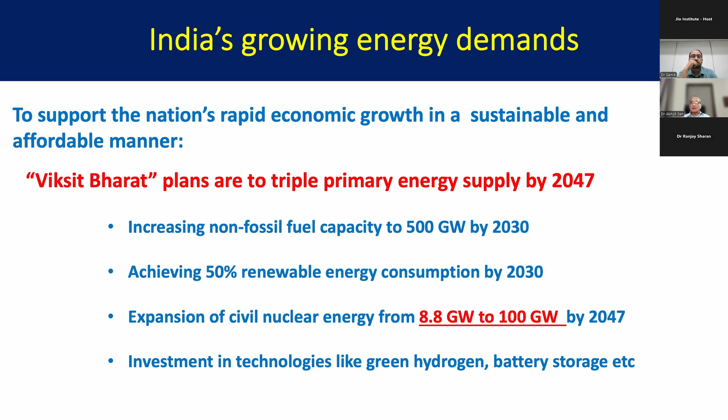India has really made significant progress in this direction. In fact, even before 2030, I think we have achieved this goal of increasing our renewables and getting clean energy. However, the problem with renewables is that you can get clean energy, but it has variable generation. So nuclear power is the only clean energy with a constant base load, and that is our primary need.

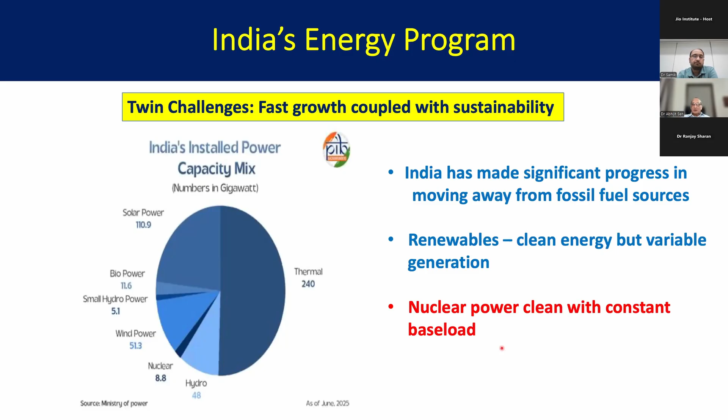So India had already thought about this way back, and they put in a very elaborate nuclear program in place, which is the famous India's three-stage nuclear program, designed to keep in mind India's modest uranium resources, but abundant thorium resources. This was framed way back by Homi Bhabha, and it's based on a closed fuel cycle principle.

The first stage uses pressurized heavy water reactors using a mix of uranium-235 and 238, which also produces a small quantity of plutonium-239. The second stage, which is now being developed and is about to begin, is to use a fast breeder reactor to generate more plutonium-239 and energy, and over time build up the plutonium inventory, and then use thorium as a blanket to breed U-233.

And this will then be used in the final stage to produce very large production of electricity. To speed up this process, there is now talk of encouraging private sector investment in nuclear power projects, including the development of small modular reactors, which is the recent innovation in this field.

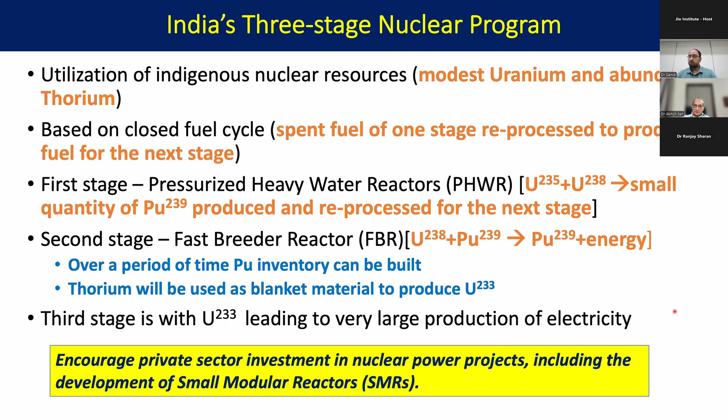So where do we start? What is the case for fusion in this context? Why should we consider it? As you know, fusion has an abundant fuel.

The basic fuel that we use is deuterium from seawater, and tritium can be bred in a reactor. So there's no shortage of fuel. It's also very energy dense - it's 4 times as much as nuclear fission reactions at an equal mass. Of course, it is clean - no CO2, no long-lived radioactivity, no risk of proliferation - and it's safe because there's no risk of meltdown. So fusion forms an attractive and strategic component of a net zero energy mix for the future.

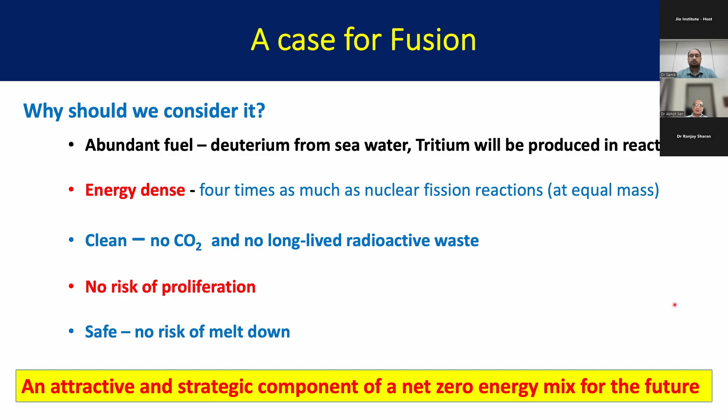This has been known for a very long time. The basic principles have been known, and all these advantages have also been well known. So therefore, fusion has been pursued for a very long time. It's actually been the holy grail of energy research. And there were a lot of false announcements in the past.

Way back in 1951, there was this claim by Argentina's dictator, Juan Perón, that they were working on secret research on a remote island, and that they had already achieved fusion. But later on, this research became classified. The famous case is Project Sherwood in the USA. Then around 1955, at the Atoms for Peace conference, fusion was declassified. And this is where Homi Bhabha, as the chairman, made his famous prediction that fusion will be available in 20 years.

More progress was made in the late 60s when the Russians started working on a tokamak. In their T3 tokamak, they announced a 1,000 electron volt electron temperature, which was the highest at that time, and which surprised everybody. But this was then confirmed by scientists from Culham and Artsimovich, who actually toured the US.

This established a working relationship between the US and the Soviet Union. So the big question is, if this was so long known and work has been done for such a long time, why is it taking so long? We still don't have fusion, despite Bhabha's prediction in 1955.

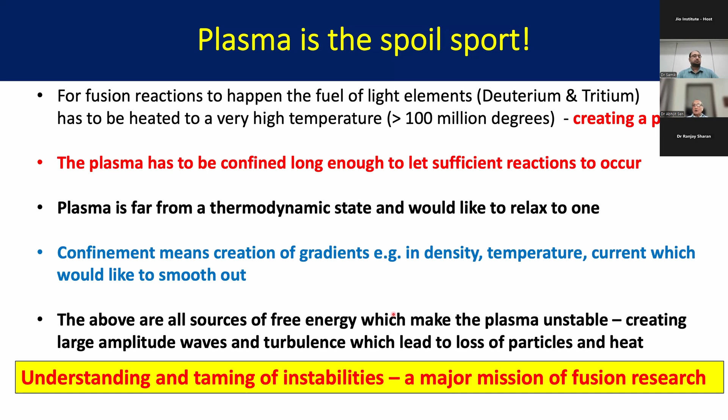So all these are sources of free energy which make the plasma highly unstable. The plasma would like to get out of this confined state, and it does so by creating large amplitude turbulence, which leads to loss of particles and heat. This collective phenomena in plasmas is an aspect that was ignored very early on, when people thought that just by confining charged particles in a magnetic trap, you could achieve fusion. But once this was understood, the whole subject of understanding and taming instabilities began, and this has been the major mission of fusion research over the past several decades.

So what are these plasma instabilities? You can think of a fluid where you have these waves, and the waves can go to large amplitudes. You can categorize it by the scale size - gross distortions, which arise from large-scale collective motions, are one class of instabilities. Or you could have very fine-scale instabilities, which involve the interaction of these gross waves with particle distributions, and this can lead to turbulence, and turbulence can lead to a rapid loss of confinement.

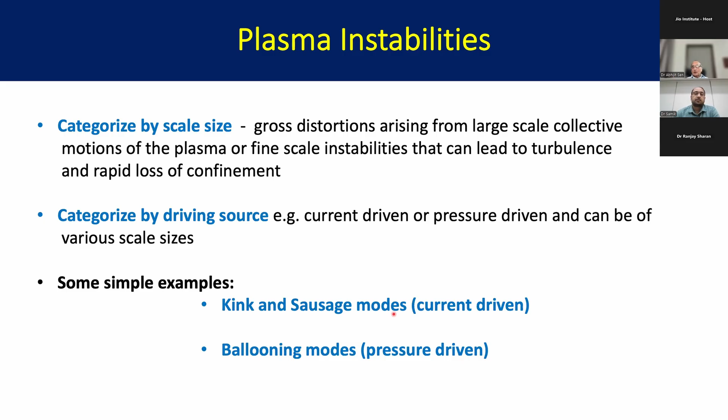You can also categorize it by what is driving the instability. The driving source could be a current, or it could be pressure, and these can again be of various scale sizes. Some simple examples studied from the early days are things like kink and sausage modes, which are current-driven, and ballooning modes, which are pressure-driven. Here is an example of a kink and sausage instability.

Just to give one example, in the early days they were studying pinch experiments, in which you pass a current in one direction, and this current generates magnetic fields which encircle it, and this tends to compress the plasma - that was the pinch configuration. But if you now perturb this configuration slightly, for example pushing it out this way, you can see the magnetic fields are more densely configured on this side and more sparsely configured on this side. So the magnetic pressure is higher here and lower on the other side, and that pushes the distortion much more, making it unstable.

So this kind of thing was also manifested in toroidal devices. These are some actual pictures from early pinch experiments. People found ways of controlling this by putting in a magnetic field or a conducting wall outside, and so this was the early days of instability studies.

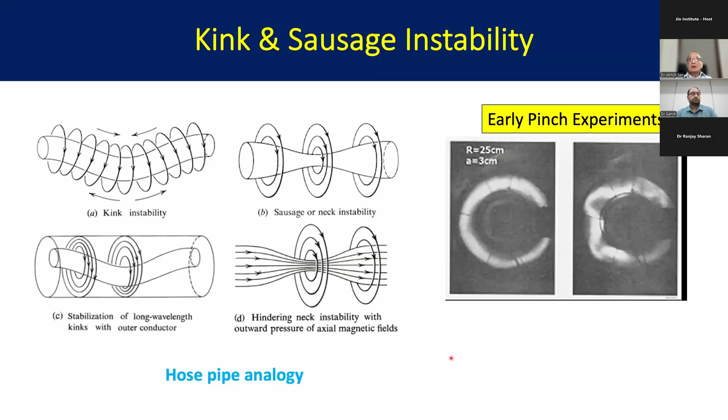But these things also show up in the tokamak configuration. In the first lecture, Rajesh had shown how you create a tokamak configuration by a combination of a toroidal current, toroidal magnetic field, and a poloidal magnetic field. These create very nice nested magnetic surfaces, and the plasma is basically confined by these well-formed magnetic surfaces.

So the way the toroidal field and the poloidal field wind around each other, that winding number, the inverse of that, is specified by a quantity called Q. It essentially defines the twist that you have in the magnetic field line. It depends on the ratio of the minor to the major radius and the toroidal field and the poloidal field. So it's proportional to 1 over the poloidal current, or the plasma current, that you generate in the toroidal direction, which is what creates the poloidal field.

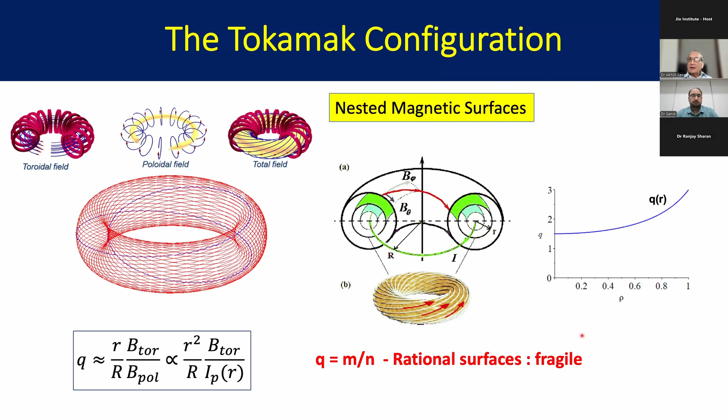So this factor Q is a continuous function, increasing towards the edge of the plasma in a tokamak. There are certain surfaces here called rational surfaces, where m and n are integers, and these are very fragile. This is where, if you disturb those surfaces, they can create an instability there.

One of the earliest and most widely studied such instabilities is the sawtooth instability. This is a kink instability that takes place at the Q equal to 1 surface, and basically it's a thermal instability.

As you keep heating the plasma, the current at the core keeps increasing, because the current depends on collisionality, and as you heat it, the collisions go down. So the current increases, therefore Q starts going down. If it goes below 1, it triggers an instability.

What happens is it starts forming these islands. As this instability steepens the gradient there, it triggers a kink instability, which is what's growing. As the island finally hits the surface, the whole gradient relaxes and it crashes. The waveform you observe, either in temperature or density, has this sawtooth-like form: it rises slowly and then crashes.

By themselves, they are not very bad. They're called internal disruptions, and if kept at a reasonable level, they actually eject impurities from the core of the plasma - it's like a burping of the plasma. But if they become very large, they can cause problems.

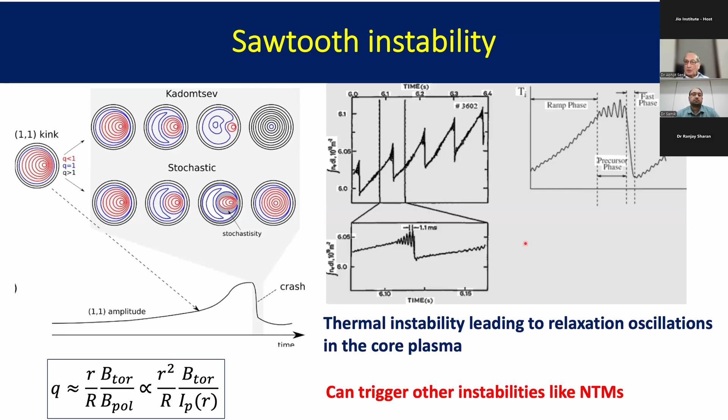Then there is something called the classical tearing instability, which occurs at other mode rational surfaces, like Q equal to 2, 3, 4, etc., or even 3 by 2. What happens is at those surfaces, if you create a perturbation in the magnetic surface, they slowly start growing into an island.

That means the surface is broken up, and you can imagine the fields being cut and reconstructed to form an island. So that's the form you see here - from the nice circular nested surfaces, on one surface you start developing a magnetic island.

Along this magnetic island, because the particles are traveling very fast around the toroidal direction, the pressure becomes flat in those directions. So that can degrade confinement.

If these islands grow very large in amplitude, they can also interact with each other - islands developing on two surfaces can, for example, nonlinearly interact. This creates a major perturbation in the plasma, leading to something called a major disruption, in which the current is suddenly totally destroyed and all this energy is sent to the wall. This is what Dr. Vaty had also discussed in his talk last time.

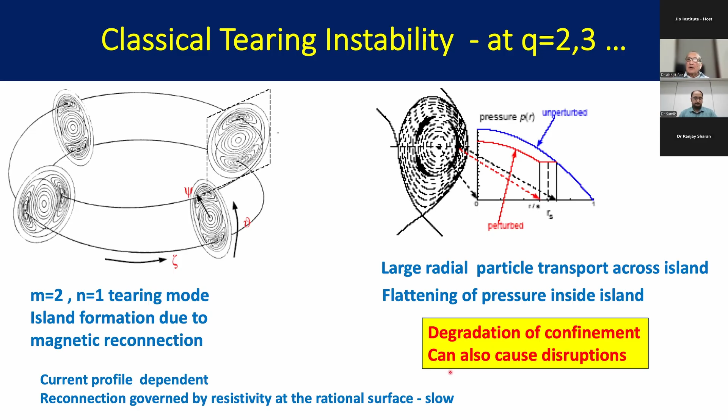The basic physics underlying it is this whole business about reconnection, in which the field lines are rearranged, governed by the plasma resistivity at those particular rational surfaces. It's normally a very slow process, so if you do not have a long-lived plasma, it may not pose a great threat. You can normally control this by modifying the profile of the current.

But when you go to very large, very high temperature plasmas, there is an analog of this called the neoclassical tearing mode. Neoclassical in this sense means that in a toroidal geometry, you have another class of particles, because as you go along the magnetic field, and since the field is increasing from the outer edge to the inner, you can have a mirror-like configuration. Some particles get trapped in this mirror-like thing, and that gives rise to a current.

This is called the bootstrap current - bootstrap because it depends on the plasma gradient itself. So the plasma is self-generating this current, which is really a good thing, because then you can reduce the current that you are imposing from outside.

But these instabilities can actually reduce your confinement by a great deal, and therefore they can really limit the amount of pressure that you can hold in the plasma - this is a quantity called beta. So they are a major concern for all reactor-grade machines, and if they grow very large, they can also create major disruptions.

So control of NTMs has been a major research effort over the years. The basic idea is that within this island, the bootstrap current is lost, and that's what creates this instability.

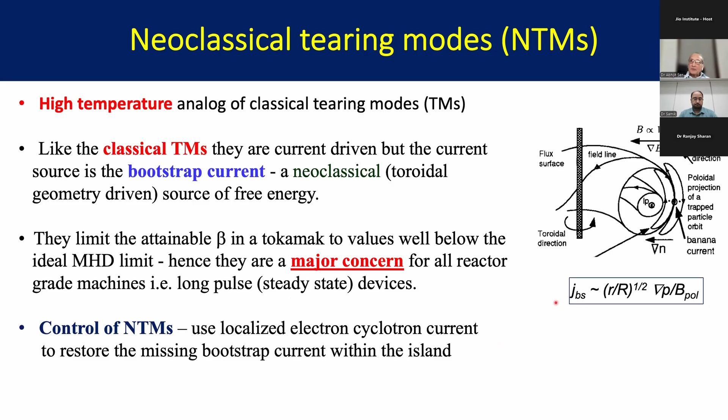So one way is to restore the current within that island. The way people do that is to first locate the island and then drive an external current through it using localized electron cyclotron current drive. This current drive mechanism can restore the bootstrap current, and again you can heal the island. This is a well-developed technique now.

Another class are these pressure-driven instabilities, called ballooning instability. The name comes from the fact that it's as if the column is ballooning on the outside. Look at the analogy of air in a tire tube: as you put more pressure in, because the outer surface of the tube is vulnerable, having stretched more than the inside, you can create a bulge there - that's ballooning. A similar thing happens here, because on the outer side of the tokamak the magnetic field lines are more sparsely spread out compared to the inner side, making it a weaker surface, and the plasma can balloon out through that region. These take the form of plumes or fingers, and this is another reason why you can limit the plasma pressure.

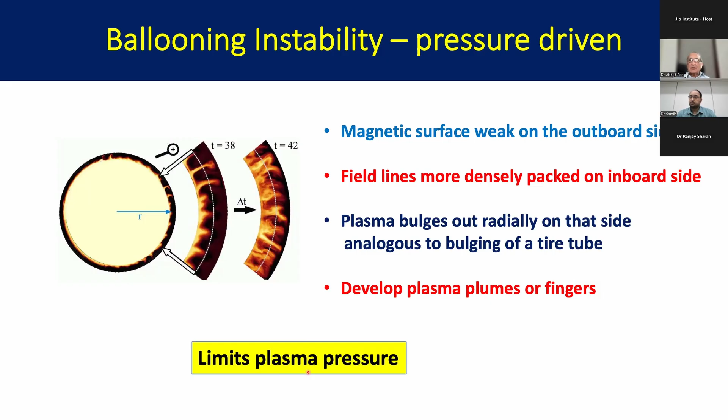This happens because you develop a barrier at the edge, by actually shrinking and moving the profile, both the current profile and the pressure profile, inward. A steep barrier is created which limits the loss of energy from the core. It's like heating a pressure cooker from outside - this transport barrier is like the lid of the vessel. If you heat it extremely highly, the whole barrier can explode.

So the lid can take off, and you would have an explosive instability, or in this case, a major disruption. The way out is to actually leave a little hole or space in the lid so you can put a little spoon under it and leak out the energy. This is done in a tokamak by having external resonant perturbations, which create little islands, like holes in the magnetic surface, and these leak out the energy. That is how you control ELMs to a reasonable level so you don't put too much energy onto the wall of the tokamak.

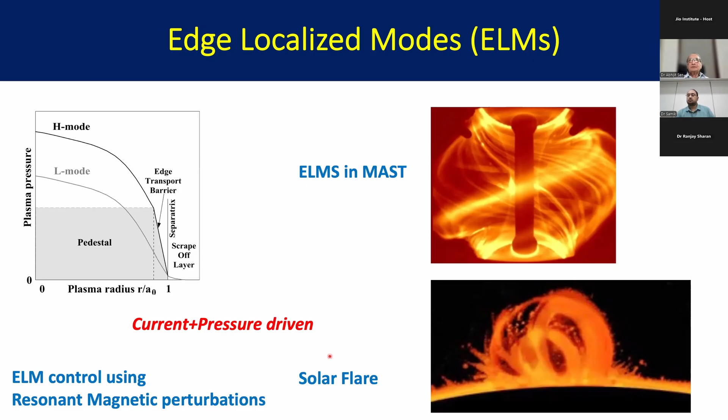Control and mitigation of instabilities has been a major thrust in plasma physics. The instabilities I discussed are called magnetohydrodynamic instabilities. These have been controlled using a combination of in-vessel magnetic coils, localized current drive at various frequencies, and if everything else fails, a disruption mitigation system using massive gas injection so you can radiate away the energy, or using shattered pellets.

These things have made great progress in recent times through the use of AI and ML, machine learning methods. The basic idea is that if you build up a large database, you can collect all the data and try to evolve an algorithm which will detect beforehand when a disruption will occur. This has been a major improvement in the control of tokamaks.

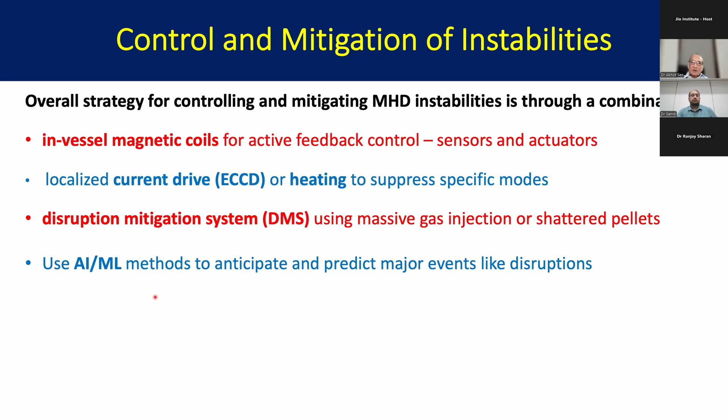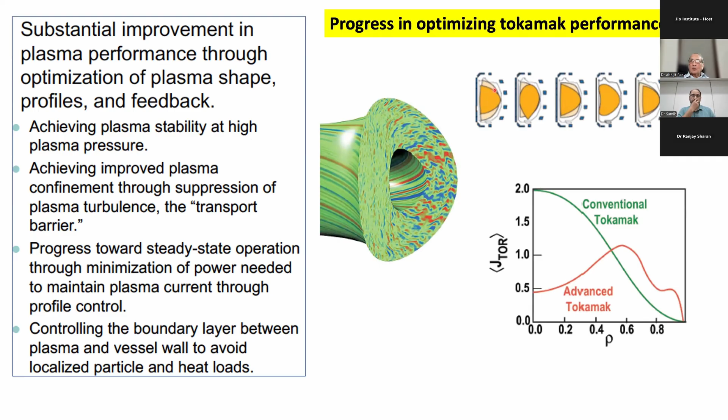This just shows how simulations have helped in shaping the tokamak profiles and improving confinement. All this has led to controlling a tokamak plasma being like actually flying an airplane - you really have to have real-time control of several features. This is just a diagram to show how you're controlling all these features in a tokamak.

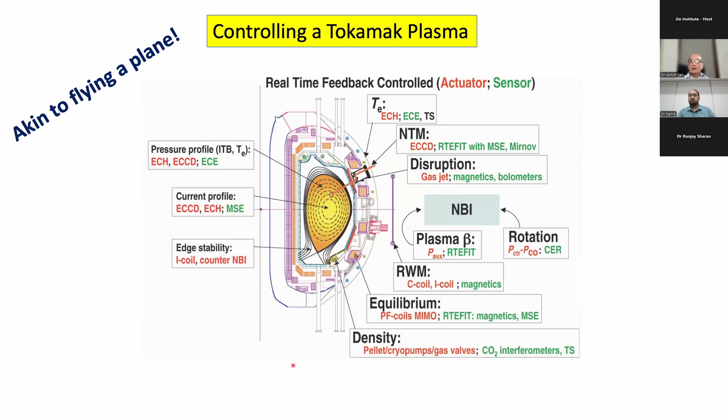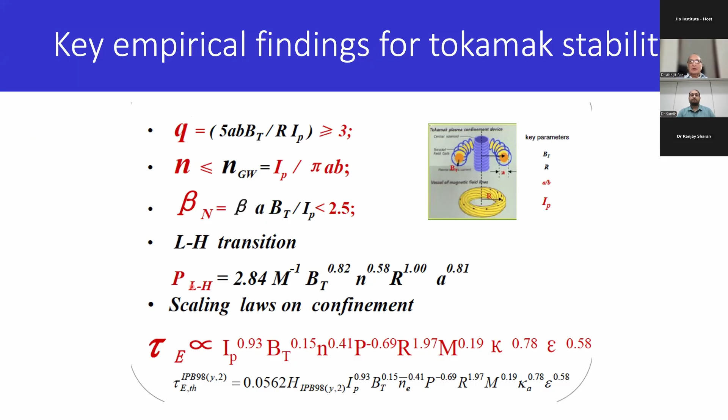All this research over several years has led to many key empirical findings for tokamak stability, basically defining the limits of quantities like Q and beta, which has defined a safe parameter regime for tokamak operation. This is what has helped the development of all these results and the progression of tokamak performance.

Ever since ITER started, a special group was formed called the International Tokamak Physics Activity, an expert group drawn from various countries responsible for defining the physics basis for the operation of a tokamak and the design of ITER. Over the past few years, they've improved and extended this to cover operation of a tokamak when it goes into the burning plasma.

There's been a series of articles in a special issue of Nuclear Fusion highlighting all the critical issues, major areas of progress, and most significant recent results. This is excellent reference material which I'd recommend for students, and it's also very good for experts to find out the recent state of affairs.

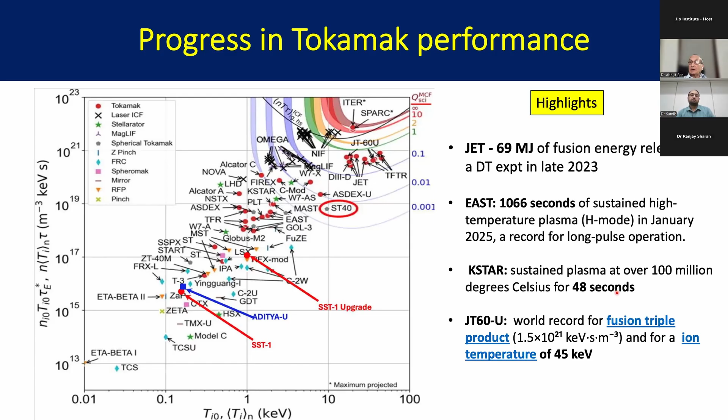So these are some of the highlights of the tokamaks. JET obtained 69 megajoules of fusion energy in a DT experiment late in 2023, after which JET was shut down. EAST, a Chinese tokamak, obtained a record pulse length of more than 1,000 seconds. K-STAR also sustained plasma at over 100 million degrees for 48 seconds, which is a record. And JT60U has a record triple product.

Against this background, let me come now to the Indian fusion program. There's a bit of prehistory. You've already been told how Homi Bhabha was the very first strong advocate of fusion energy. His presidential remark was over-optimistic, but it succeeded in opening up fusion research in the world and triggering a whole worldwide activity. He also himself set up an experimental program on a theta pinch.

Theta pinch means the current is in the poloidal direction, at TIFR. This was a very nice program, but unfortunately it was wound up in the early 60s due to some adverse publicity that fell out of a UK pinch experiment called Zeta. So it was felt that fusion was not feasible.

The next major attempt was in the early 70s, when Dr. Sarabhai formulated a plan for the development of plasma physics in order to strengthen the space physics program he had already initiated in PRL, and also to lead eventually to a fusion program. He handpicked a team of scientists from India and abroad to form a core group at PRL, which included Professor Predhiman Kaw.

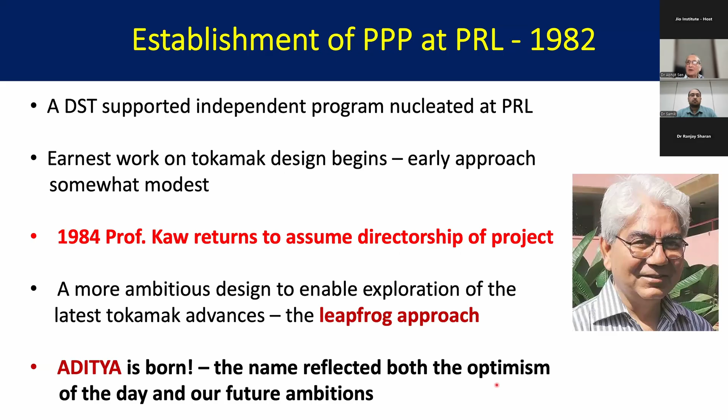The idea was that we had lost some time while tokamaks in the world had made such progress. So this was the leapfrog approach that we took, and that is how Aditya was born. As you can see, the name reflected both the optimism of the day and our future ambitions. We're trying to create a sun on earth.

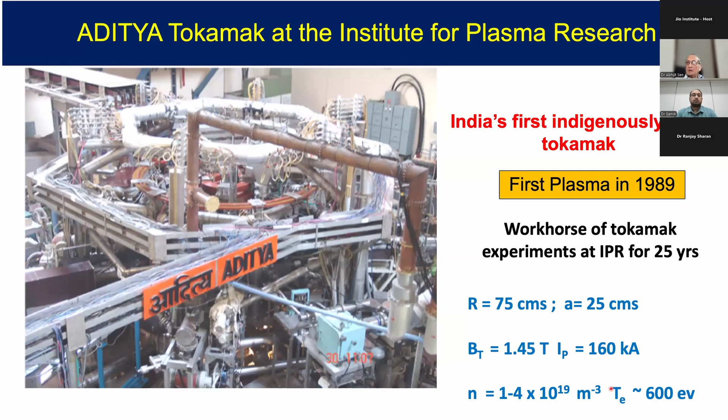Here's a picture of the Aditya tokamak at the Institute for Plasma Research. Its first plasma was obtained in 1989, and this has been the workhorse of tokamak experiments at IPR since then, for over the last 25 years now. It's a medium-sized tokamak of 75 centimeters major radius and 25 centimeters minor radius, with a magnetic field of about 1.45 Tesla and a current of 160 kiloamperes. The densities are in this region, and the temperatures that we have obtained at the maximum is about 600 eV.

So Aditya, right from the very beginning, explored many frontier areas of plasma physics and fusion physics. One of its earliest successes was the discovery of intermittency in the edge transport, which showed that the transport in the edge was not a continuous phenomena, but happened in bursts. This was a new phenomena which was then replicated by many other tokamaks. Then there were density limit experiments, all those parameters that I've shown you earlier, which actually define the safe parameter regime for any tokamak, depending upon its intrinsic parameters and the density and temperature that you can get.

An important experiment in the later years that Aditya undertook was the study of runaway electrons. These are very fast electrons which can get generated when you have a disruption, and these can be very harmful. They can actually puncture holes in your wall. So the question was how to avoid disruptions and how to mitigate disruption. These were contributed to the ITPA disruption database, and this was an important contribution from Aditya.

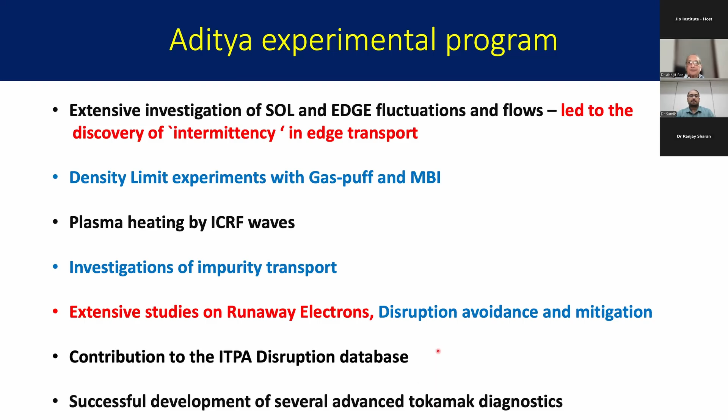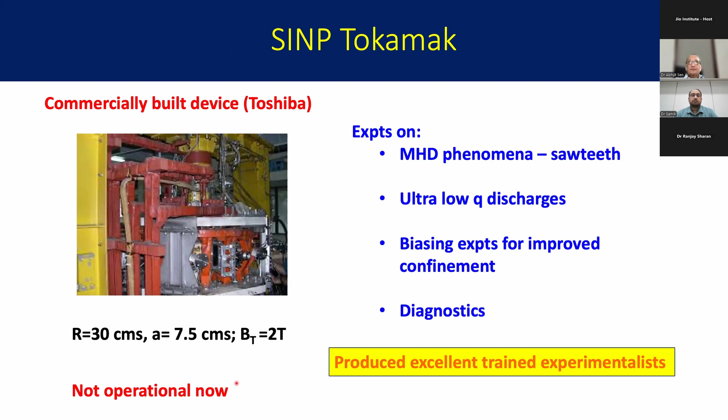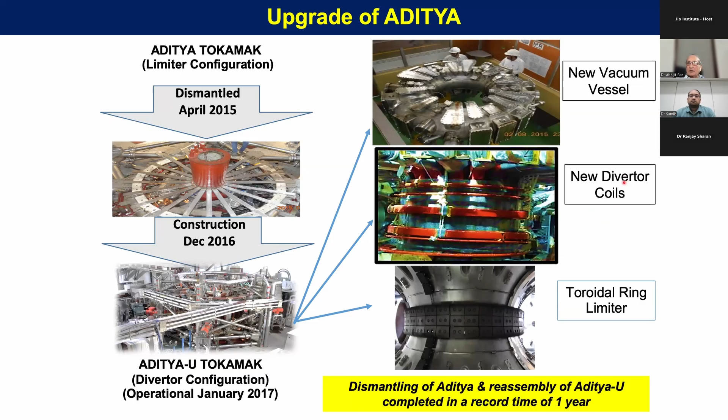Then in 2015, it was decided to upgrade Aditya to improve its capabilities. This was done in a rapid time of about 1 year. Basically what was changed was we got a new vacuum vessel and also new divertor coils. Aditya didn't have a divertor configuration earlier, along with some other hardware changes.

With Aditya U, again, a number of experiments which were at the leading edge of tokamak research in the world were carried out, including deuterium plasma operation, some novel approaches towards disruption control, runaway electron mitigation, and also very nice pellet injection experiments. A very nice pellet injector was developed in IPR, and this was tested out on Aditya.

To summarize, both Aditya and Aditya U served as rich physics research devices and also provided experience in handling a number of tokamak-related technologies. The other nice thing is it trained a number of students and technical personnel in this area.

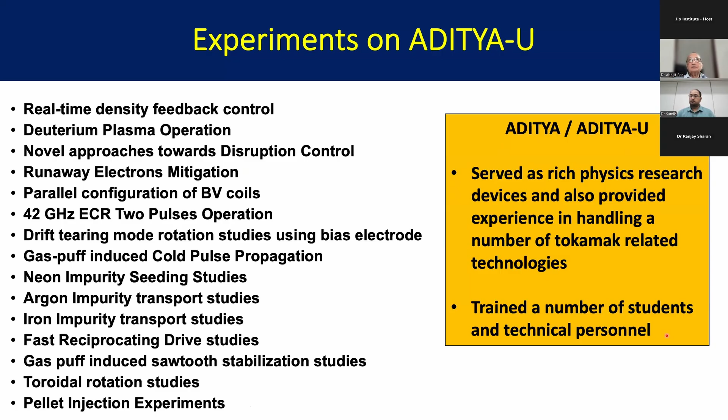The next big step happened in 1996 when we got the approval for building a superconducting tokamak, which was named SST-1. This was a state-of-the-art superconducting steady-state tokamak, which had features like shaping the plasma and a divertor. It was designed for a 1,000-second pulse. At that time, it was in the same class as EAST, KSTAR, and JT-60, which were just coming up at that time. It was not very large, just slightly larger than Aditya - 1.1 meter - but it had a very high magnetic field of 3 Tesla and superconducting magnets, so the hope was it could maintain the plasma for a very long period.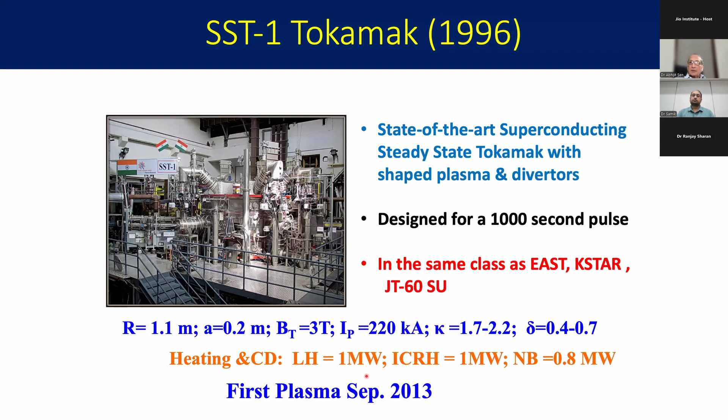It had a lot of capacity for heating and current drive at various devices using lower hybrid or ion cyclotron resonance heating and neutral beam heating. On this device, the first plasma was obtained in September 2013.

Here's a summary of SST-1 technical and physics achievements. One was that it was able to energize the magnet up to 2.7 Tesla, which is almost 90% of the design value. It achieved a plasma current of 100 kiloamperes, though not up to the design value yet. It also was able to integrate and reliably operate the liquid helium cryo plant at full capacity, and this was one of the biggest plant capacities in India.

Then all this experience with ultra-high vacuum systems. This was the largest toroidal vacuum vessel in India at that time. It also demonstrated lower hybrid current drive in its phase 1 operation.

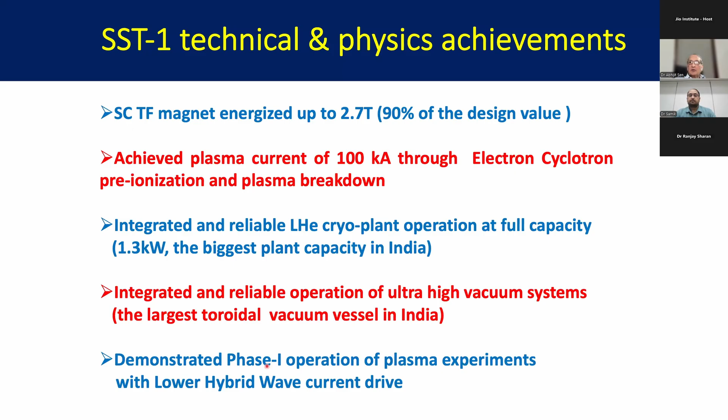It ran something like 29 experimental campaigns till June 2023. But during these campaigns, intermittently it faced technical problems related to the superconducting magnets and the cryolines. There were leaks that developed in the cryostat, the SC magnets, and the cryolines. Eventually one had to stop these campaigns and attend to these problems that we were facing.

This has been thoroughly analyzed, and a decision was taken to refurbish the SST tokamak. This refurbishment process has already started, and phase 1 of refurbishment has been completed. Now they have started machine cool down, and it's expected that SST-1 will resume operation shortly. There are also plans to upgrade all the other subsystems of the machine.

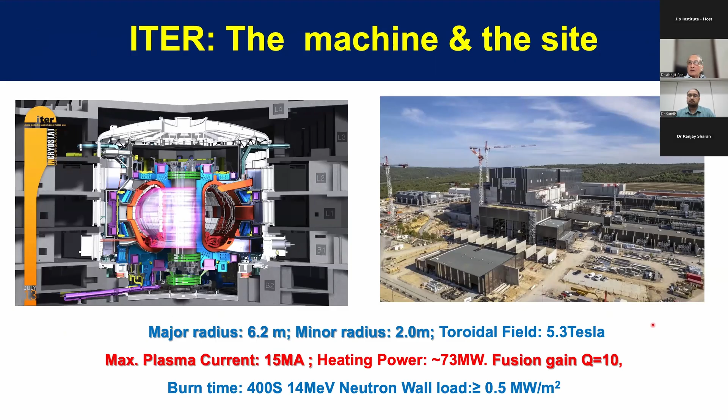Here's a picture of ITER, which is the biggest tokamak to be built, and it's making good progress, as you can see, and it's expected that it should be operational in a few years.

India had the responsibility to supply about 10% of the major procurement packages that ITER needed. Here are some of the packages described. If you look at the cryostat, which is the biggest cryostat in the world, or the biggest vacuum vessel you can think of, this was one of the things India was assigned to do. Many of these packages involved first-of-its-kind technology and required R&D to actually accomplish those technologies. This was a major challenge, which I think benefited us a lot.

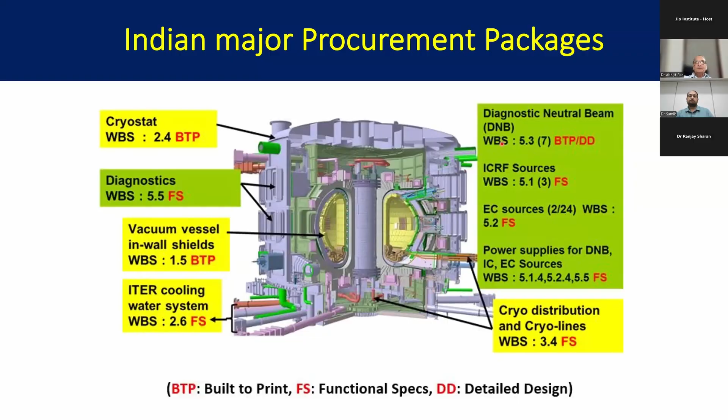India has now more or less delivered most of the packages it had undertaken. Here's an example of the cryostat. It's a huge device, as you can see, weighing 3,850 tons. This has been delivered and is being assembled in ITER.

It also developed very high voltage power supplies and ITER distribution lines, which are under manufacturing. These are the lines being installed in ITER.

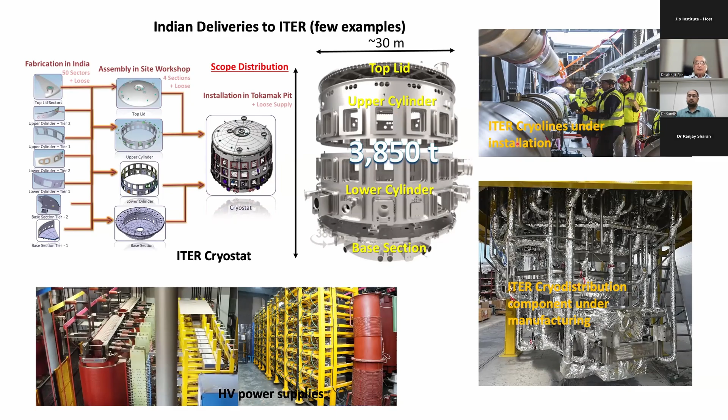Another big advantage of participating in ITER was that it set up R&D facilities in IPR to ensure ITER deliveries. These are highly sophisticated test facilities, for example, for neutral beams, IC heating, electron cyclotron heating, created in a special lab for ITER-related developments in IPR. These test facilities will qualify and establish that the deliverable parameters for ITER are reached for each of these subsystems.

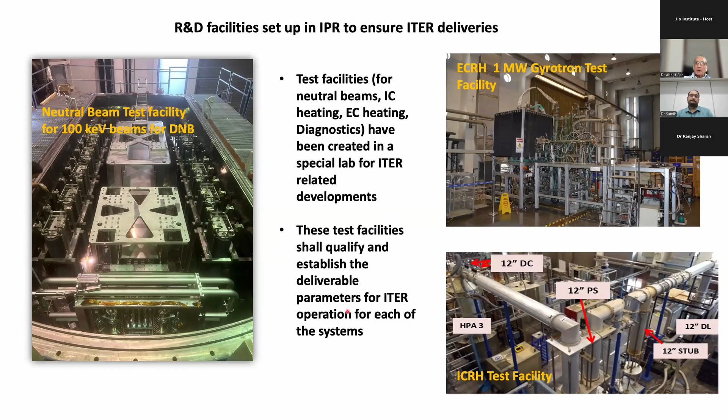It's also been a big boon for Indian industry. Indian industries have acquired competence in manufacturing that meets demanding international nuclear quality and safety standards. Some major Indian industries have actually participated in fulfilling these ITER packages that India has been asked to deliver.

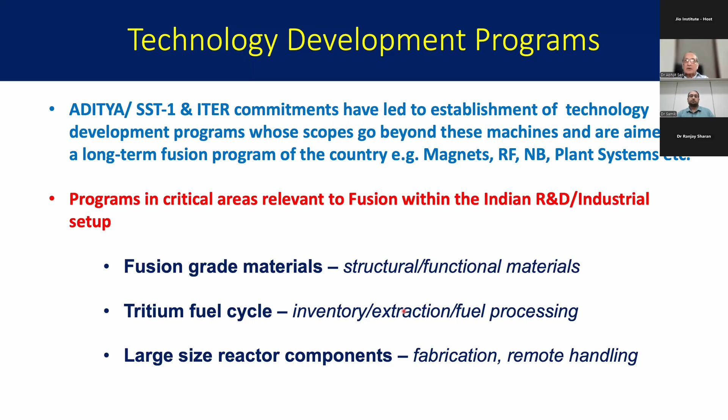Both Aditya, SST-1, and ITER commitments have led to establishment of technology development programs whose scope actually goes beyond these machines and is aimed at a long-term fusion program of the country. Some examples are in magnets, radio frequency heating or current drive, neutral beams, and plant systems. Also, programs in critical areas relevant to fusion have been set up within the Indian R&D and industrial setup, for example, work on fusion-grade materials, tritium fuel cycle, which is part of the DA program, and large-size reactor components.

So that is our state today. And where do we go from here? That is the main question that we need to address now.

The usual path to a fusion reactor consists of three important stages. One is the stage when scientifically you achieve break-even, which means you satisfy the Lawson criteria. This can be done only through making progress in plasma parameters and confinement time so that you finally come to control of the plasma.

After you achieve scientific break-even, you can design and demonstrate a demo device where you use all this scientific expertise, but also prove the engineering feasibility and establish that it can generate energy, so that you can go on to a machine which will actually deliver electricity to the grid. So these are the three major steps.

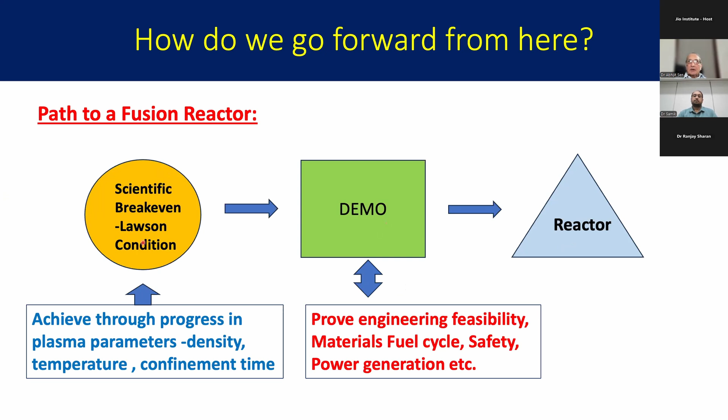But the most critical step is this: from scientific break-even, how do you project to a demo? Let's see what other people have done in this respect. What are the global projections for demos?

If you look at the major parties, for example the European Union, this is banking on ITER to demonstrate break-even. That is their break-even machine, and they have participated and also sponsored ITER to a very large extent. ITER plans to start operation in 2035, which is their latest prediction. It will commence DT operation in 2039 to achieve break-even.

So EU is planning its design activities to start around 2027, construction in 2040, and operation in 2050, followed by a commercial reactor in the second half of this century. That is the usual conservative path to a fusion reactor, which EU is following. Of course, EU individual members have their own fusion programs, comprising several tokamaks and other devices spanning several decades.

JET has been one of their star performers in this, as I showed earlier. Next, you come to USA.

It's one of the longest histories of fusion research with several experimental devices. Their program has actually gone through several ups and downs in the past, but they have a tremendous record in achieving good plasma progress. Their program is spread over national laboratories as well as universities.

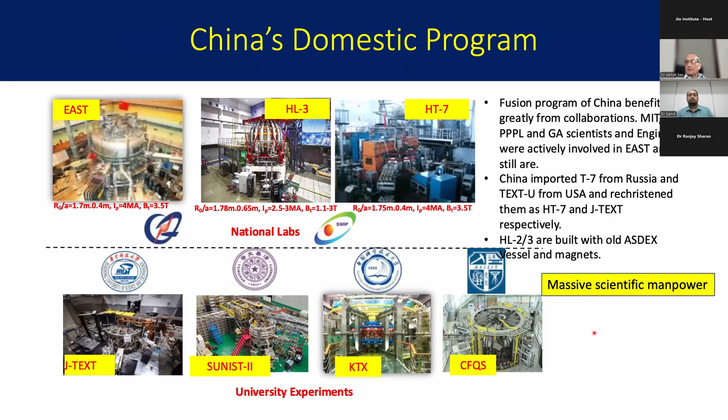So what are the key takeaways from these major programs? One, of course, is they have very strong domestic programs, based on a series of successively larger and advanced devices spread over national laboratories as well as universities. They have strong linkages with industries to advance technology development and establish a supply chain, and well-planned trained manpower development programs through involvement of academia. All of them have had major international collaborations, both bilateral as well as multi-party.

In recent times, because of this great upsurge in private funding of fusion research, by recent estimates approaching $10 billion now, and also based on all these technology innovations that have taken place, all these parties have a willingness to adopt them in their programs, accept these innovations, and move on a faster path.

So given this background, what is the path we need to follow? That is the question I would like to address next.

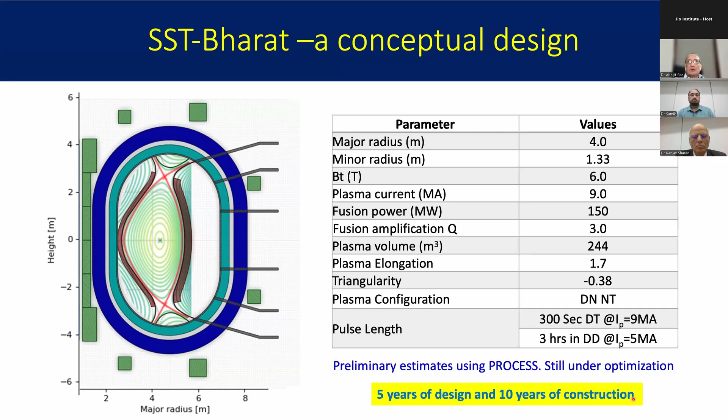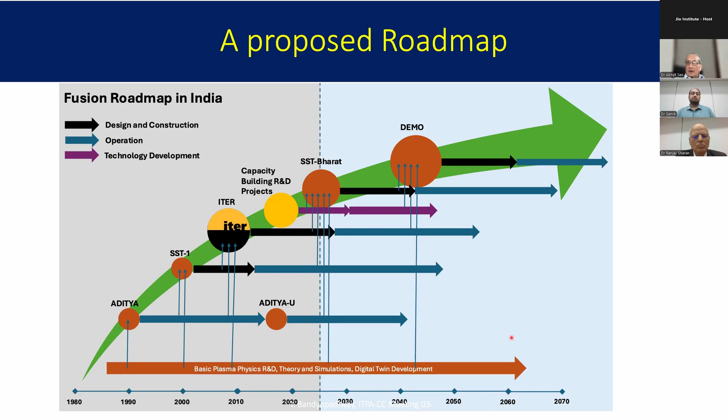The estimate is that this could take 5 years of design and 10 years of construction. That would really advance us in this way to a demo. So this is a conceptual proposed roadmap - as you can see, from SST1 we'd go to SST Bharat, which can lead on to a demo. This would put us into the 2050s or 2060s, and then you'd have a reactor after that.

So how do we analyze this machine and this roadmap? I think it is a good goal to have, but as you can all see, it's a giant stride that needs to be broken into small steps in order to be a practical path forward.

So what is the primary constraint that we have? I think the primary constraint is the lack of sufficient expertise and experience in producing, controlling, and diagnosing progressively hotter and denser plasma. We have done very well with Aditya in all these areas that we wanted to do, but Aditya is a limited, small machine, and you can only have a density or temperature up to a certain extent. So you cannot go to that region where all these things are possible.

So unfortunately, there is no shortcut for that. We need to expand our domestic program to provide for a broader experimental base.

Most important, we need to create a large pool of trained personnel to participate in the scientific capacity building to get to a demo. So these are the demands that we have on our program. Now, how do we go about that?

I'm just listing here a few intermediate steps that need to be taken in parallel for capacity building. We cannot do all of this in a sequence because then we will be really late in getting to a demo.

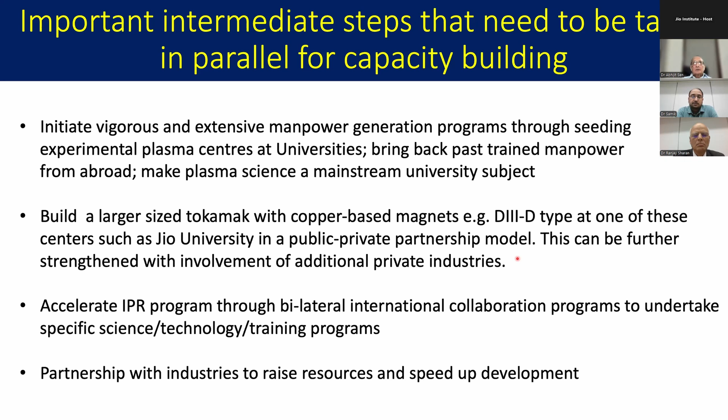I can relay that to you once you answer this one. As I mentioned briefly, the role of AI and ML is on two main fronts. One is that it can really help in the design of the machines. They can also help create what are known as digital twins, which are computer simulations of an actual machine, where you can change the parameters and see how it performs. ML helps by developing algorithms or models based on past data generated from various experiments.

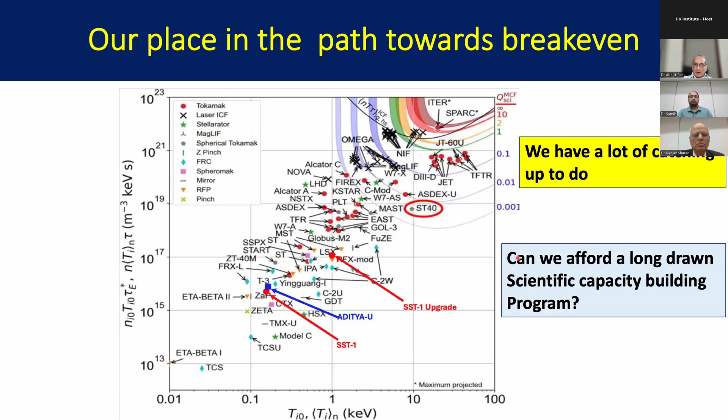India is actually investing in that. Even at IPR, we are developing computer models to deal with this. This is something that needs to be developed to a great extent. We have the resources and certainly the talent for this kind of work, and we are also trying to build up our computer resources by installing very large computer systems in the country, including proposals for doing that at IPR.

His second part was that ISRO has demonstrated indigenous cryogenic engine capabilities for space research, and fusion energy is now seen as a critical pillar for sustainable energy. So how do you see parallels where AI and ML could play an integral role in advancing fusion reactor performance, particularly in predicting instabilities and ensuring plasma stability within India's long-term fusion roadmap?

As I mentioned, it can certainly play a very important role in prediction and control. That's what's being actively done elsewhere in the world.

Basically, on the basis of large amount of data that has been obtained over a large number of tokamaks, they have developed algorithms based on AI and ML techniques to build prediction models which can tell you, given a certain parameter configuration or certain symptoms observed in the evolution of the tokamak discharge, that disruption will happen, with a prediction capability of over 90%. Therefore, you can put your control machinery into operation and either quench that thing, or if it does happen, nip it in the bud, or prevent it from taking place altogether.